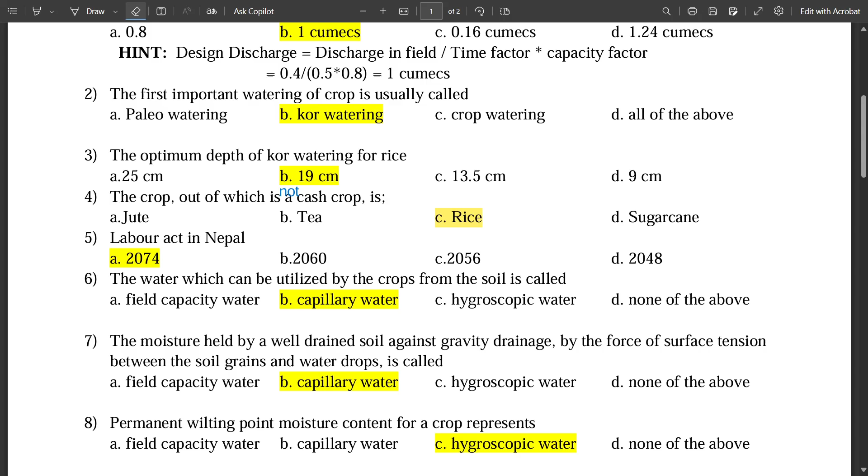Question number 9. The optimum depth of kor watering for a crop is 15.12 cm. The outlet factor for the crop for 4-week period in hectares per cumec is option A 1000, option B 1200, option C 1400, option D 1600.

So the answer for this question is delta is equal to 8.64 B by D. So substituting the values, we have delta given as 0.1512 meter and B is 28 days. That's 4 weeks. 4 weeks is equal to 28 days. So the outlet factor for the crop is 1600 hectare per cumec. Option D.

Question number 10. Irrigation canals are generally aligned along option A ridge line, option B contour line, option C valley line, option D straight line. So the right answer is ridge line.

Question number 11. What is the dimension of Chezy's coefficient C in Chezy's formula? Option A L to the power 1 by 2 T to the power minus 1. Option B L square T to the power minus 1. Option C L to the power minus 1 T to the power minus 1. And option D LT. The right answer is L to the power 1 by 2 T to the power minus 1.

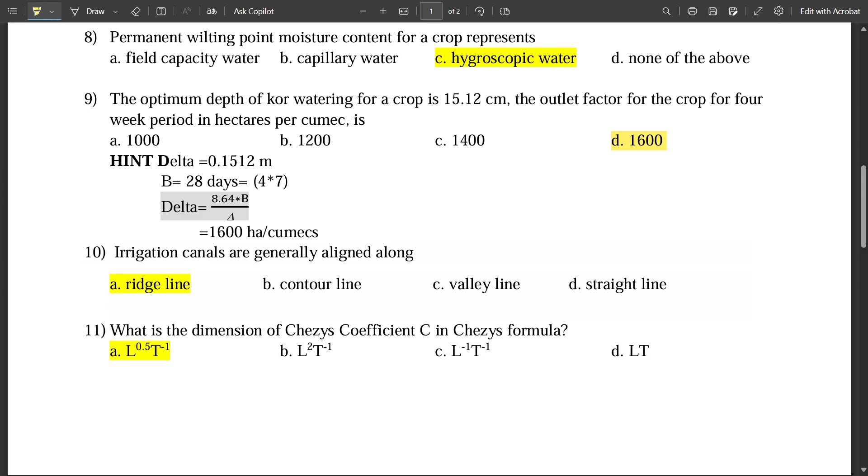In gravity canal, full supply level is always at ground level, below the ground level, a few centimeter above the ground level, or 4 to 5 meter above ground level. The right answer is option C, a few centimeter above the ground level.

Question number 13. In Lacey's regime theory, the regime velocity is proportional to q by f square, qf square to the power 1 by 6, q to the power 1 by 6 by f, or option D, none. The right answer is B, qf square to the power 1 by 6. Full supply level of a canal at its head with respect to parent channel is kept option B, 15 centimeter lower.

Question number 15. According to Khosla, the exit gradient of surface flow, option A, depends on B by D, independent of B by D, independent of depth of downstream cutoff wall, or option D, none of the above. The right answer to the question is none of the above.

The sequent depth is always option A, less than alternative subcritical depth, option B, more than alternative subcritical depth, option C, equal to alternative subcritical depth, or option D, none. The right answer to the question is less than alternative subcritical depth. Question number 17. Retrogression is the lowering of river bed upstream of weir during initial years of construction.

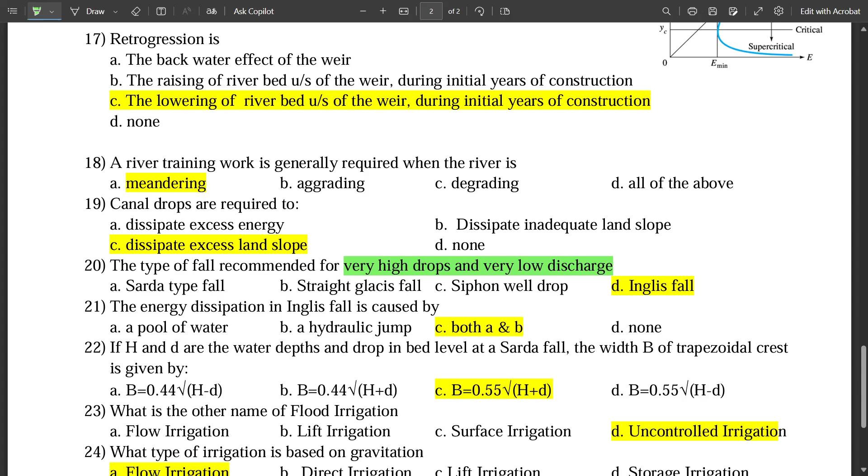Question number 21. The energy dissipation in Inglis fall is caused by option A, a pool of water, option B, a hydraulic jump, option C, both A and B, and option D, none. The right answer to the question is both A and B, a pool of water and a hydraulic jump.

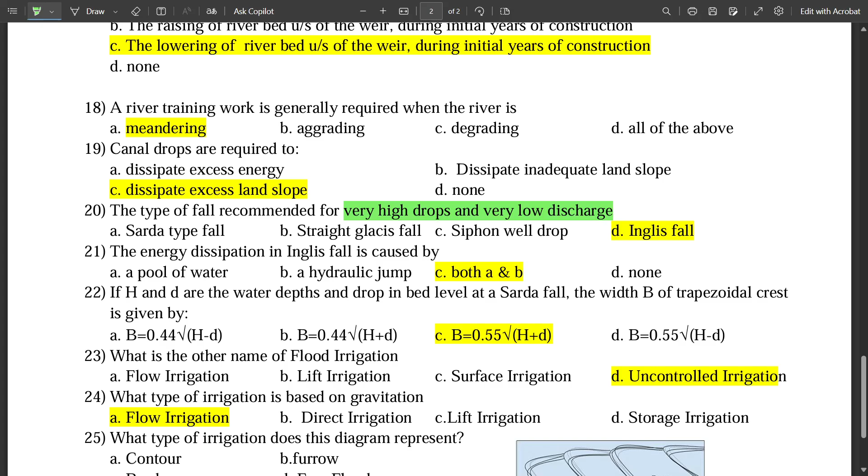Question number 22 we have, if H and D are the water depth and drop in bed level at a Sarda fall, the width B of trapezoidal crest is given by B equals 0.55 under root H plus D.

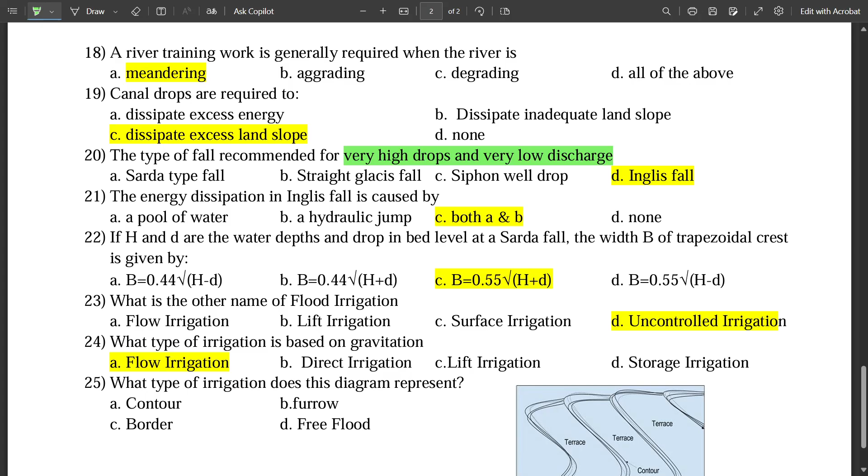What is other name of flood irrigation? Option A, flow irrigation, option B, lift irrigation, option C, surface irrigation, or option D, uncontrolled irrigation. The right answer to the question is uncontrolled irrigation. Flood irrigation is also called uncontrolled irrigation.

Question number 24. What type of irrigation is based on gravitation? Flow irrigation. And question number 25 is, what type of irrigation does the diagram represent? Here is the diagram. So we have to find what type of irrigation this is.